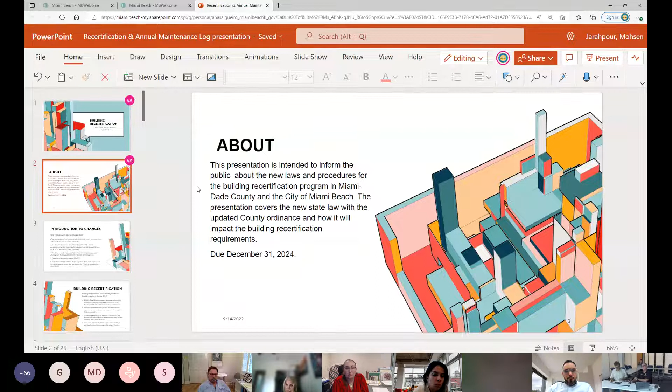Okay, Mohsen already went over the introduction, so I'm going to go right to the changes. There were changes in the state law, as you see, May 26, 2022. The state didn't have a recertification program like we do. We have been doing this since 1975, and due to the collapse of the Surfside building, they created this new law.

These inspections for buildings that are 3 stories and taller, condominium buildings mainly, are going to have to be inspected at the 25-year anniversary and every 10 years thereafter. The other buildings will be in a 30-year cycle, so a 30-year anniversary, and then every 10 years thereafter.

So what we have here, again, they used to call this 40-year certification. It's not 40 years anymore. It's actually 25 and 30. The condominium buildings that are 3-story or taller have to be recertified, and the condominiums that are located in coastal or near coastal areas.

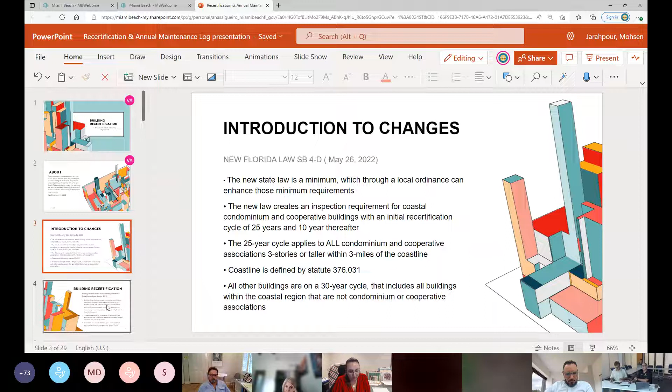It's basically a knowledge of what the recertification is. Again, it consists of the structural and electrical inspections, and these are minimum inspection procedure guidelines in a template. The engineer creates a report based on a template produced by Miami-Dade County, by the Board of Rules and Appeals. The engineers don't have an option to follow their own settings; they have to follow these templates to submit the reports.

The report format is available on the Miami Beach Building Department website. The purpose of the inspections is determining the structural condition of the building and also the condition of the electrical systems. The inspections or report must be performed by an engineer or architect with registration in Florida.

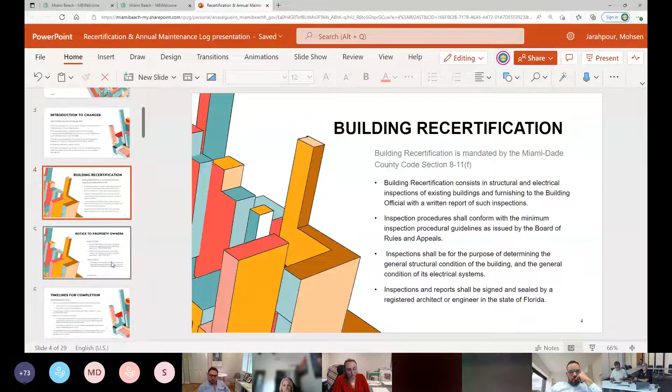This is something new in the law, or the Miami-Dade ordinance: the owner will be receiving advance notification of the recertification. There are going to be three notices: one 2 years prior, the next one 1 year prior, and the official one 90 days prior to the recertification deadline.

The difference is, before, we used to send only, for the 40-year certification, a notice 90 days prior to when the certification was due. But now it's going to be 3 notices. The first notice will be 2 years before the certification is due, the second one 1 year, and the third one, the final notice, 90 days.

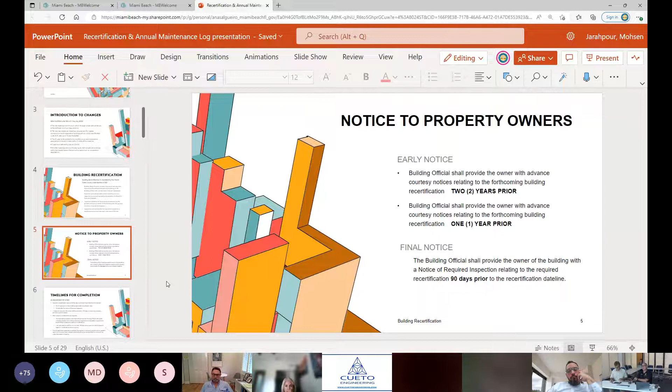Timeline for completion. So you get a notice that your building is due for recertification, and you have 90 days to submit the inspection report. If the engineer or architect that is hired by the owner is able to recertify the building, then the process is basically completed.

But what happens many times with these reports that we receive is the engineer is not able to do the recertification because there are deficiencies. And when there are deficiencies, you have another 60 days, so 150 days from date of notice. You have another 60 days to hire a contractor, and the contractor needs to obtain permits to do the repairs.

So the process that follows: first the owner needs to hire a professional engineer or architect within the 90 days. Now, if they require repair, they get an additional 60 days, a total of 150 days, in which they need to hire a contractor and correct the deficiencies noted and observed by the architect or engineer.

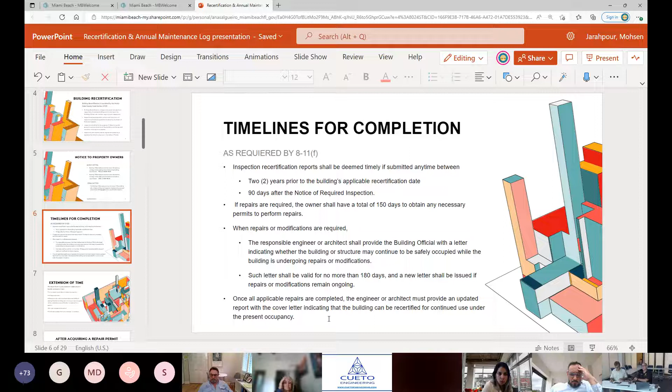This is extension time. This is just in case the 90 days that we previously talked about went by and you have not been able to submit the report for any reason. We need to get a letter from the engineers. Sometimes there's one engineer or architect doing both, but sometimes different professionals are doing structural and electrical. We need to get a letter from them to be able to give you a 60-day extension.

It's also important that the letter states that the building is safe to be occupied during that time, because it's important when the certification is due to make sure the engineer or architect is involved, and it has to be requested by them.

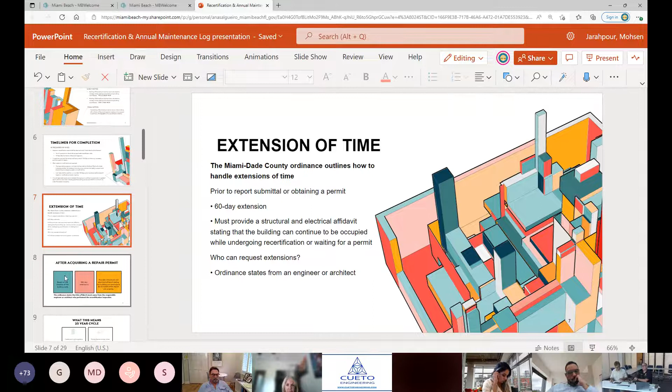Going back, okay, after acquiring a repair permit. So a repair permit, like any other permit, needs to be active, and there has to be progress in construction, whatever the permit is for, otherwise the permit expires. Correct. So it's very important that your contractor calls in for inspection at least every 180 days in order for that permit to be active and live.

So that permit is related to recertification. So once every 180 days, you've got to make sure that the contractor calls for inspection, and also the inspection needs to be passed and approved. That means there's progress. And also provide a letter from the engineer to request the extension, stating that the building can continue to be occupied while the repairs are ongoing.

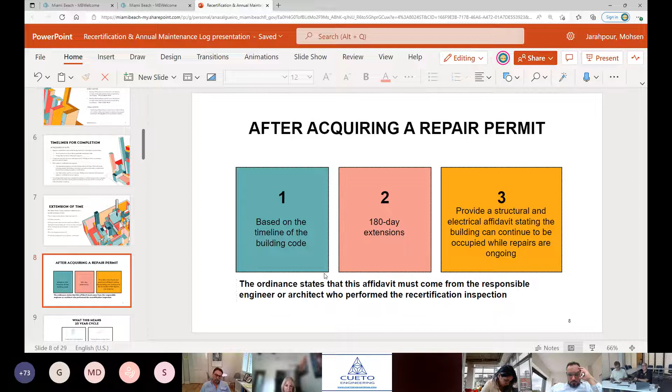The 25-year cycle. This applies to condominium buildings or cooperative buildings that are 3-story or taller. And this slide talks about the buildings that are in the transition period, the buildings that in the previous law were not required to be recertified until 40 years, but now, since the law changed, they're gonna have to catch up to the new 25-year cycle.

So these buildings between 1983 and 1997 will have to be recertified by December 31st, 2024. And the city has already sent early notifications for these buildings.

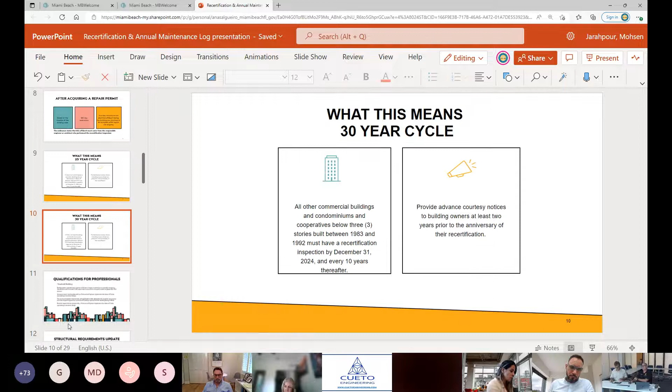Similar to the other buildings, the ones that are not three-story and taller and not condominiums, those buildings between 1983 and 1992 need to catch up to the new 30-year cycle by December 31st, 2024. So that date is a key date for all the buildings that are in the transition between the previous law and the new law.

This is a new requirement in the law for threshold buildings. And threshold buildings are high rises, but they don't need to be high rises: 3 stories or 50 feet in height. And also there are other types of buildings like churches or auditoriums that also qualify as threshold buildings.

So those buildings that are more than 5,000 square feet and also greater than 500 occupancy load would be considered threshold buildings. So if they are 3 stories or higher, say 50 feet high, or more than 5,000 square feet in area, or they have more than 500 occupancy load.

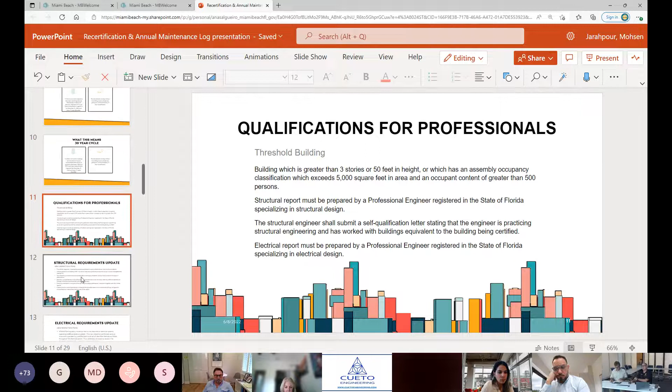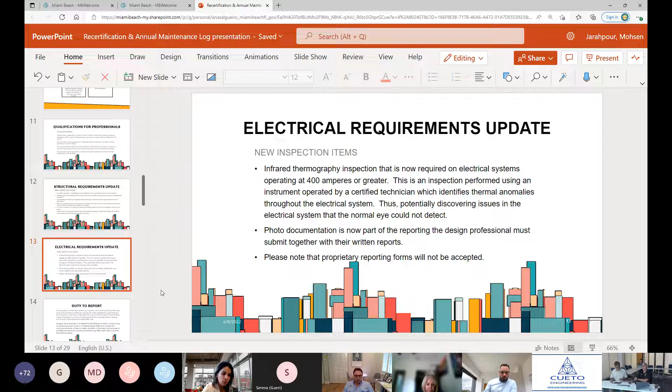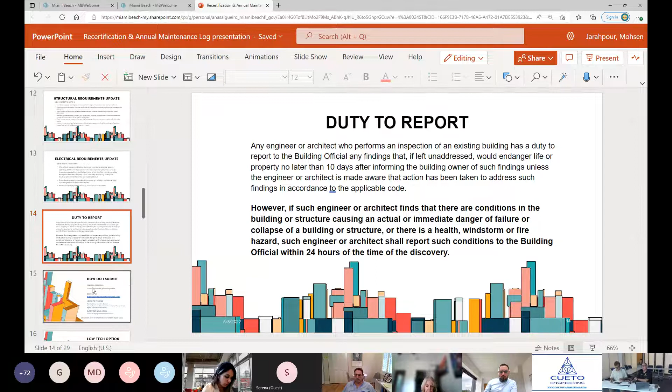Okay, one more point. Documents that are uploaded or received through email need to be digitally signed by the engineer or architect. They cannot be scans or copies of documents that were signed and sealed by hand.

Basically, there's documentation like any type of construction, like plan documentation, and it has to be signed and sealed digitally, and also it has to be through one of the trusted agencies listed in the City of Miami Beach Building Department website.

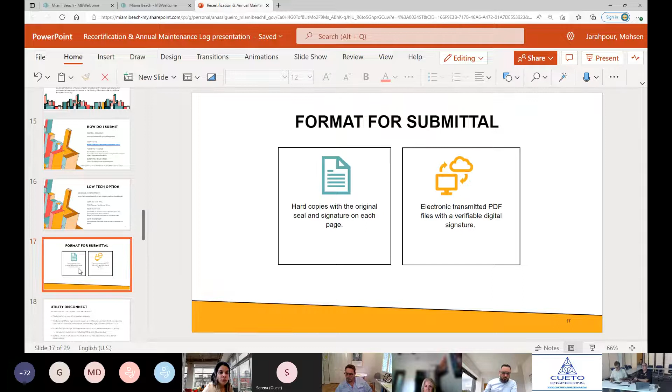We're hoping that by providing the early notice and the time, this lets buildings get organized and get their engineers together, get their contractors together, so that they can get the building recertified sooner rather than later. The new ordinance allows you to recertify up to 2 years in advance. So because we give you an early notice, if you hire an engineer right away or an architect, and you have the building looked at for both its electrical and structural components, and they're good and the report can be clean, you can then submit that report to the building department.